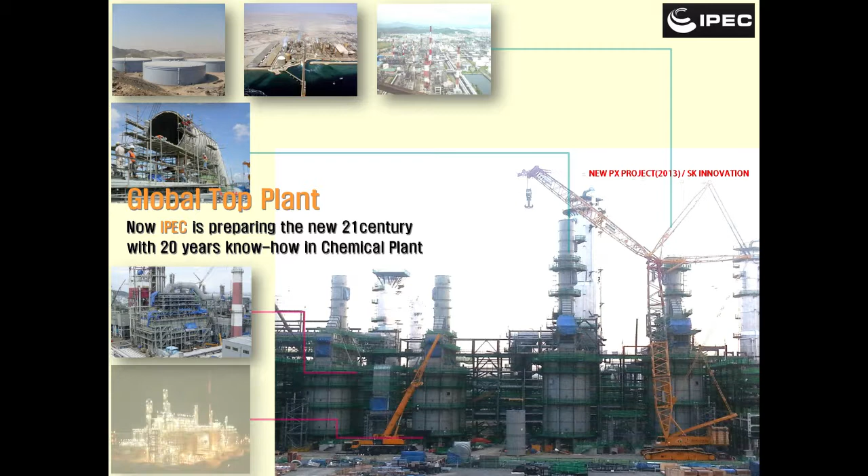IPEC took its enthusiastic first step aiming to be the best heater company, providing perfect quality and service based on 20 years of experience in the industry and excellent manpower. IPEC touches customers' hearts with interaction of deep trust.

Company profile: a summary of the company, and company background.

Organization and business partnership. Certificate of Business Registration and Registration of Chamber of Commerce and Industry, ASME stamp, ISO 9001 and 14001 certificate, registration of business, registration of construction business, and certification of international contractor.

IPEC has 2 factories, and we'd like to introduce major constructions with the detail and photos.

After President Y.H. Hwang established iPlant Company Limited, with all of his know-how, IPEC, based on all the experience of iPlant, was established in 2016 in the field of industrial heater manufacture and installation as revamping work, emergency work, refractory, any kinds of tank for plant area.

IPEC is located in Jeddah City, KSA, with 30 employees including professional technicians. Contact is 12-238-8868, and you could visit our page at www.ipec.pro.

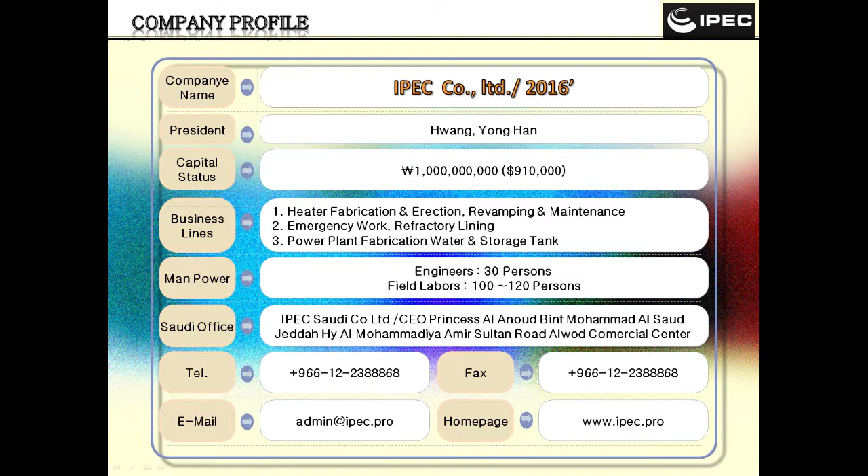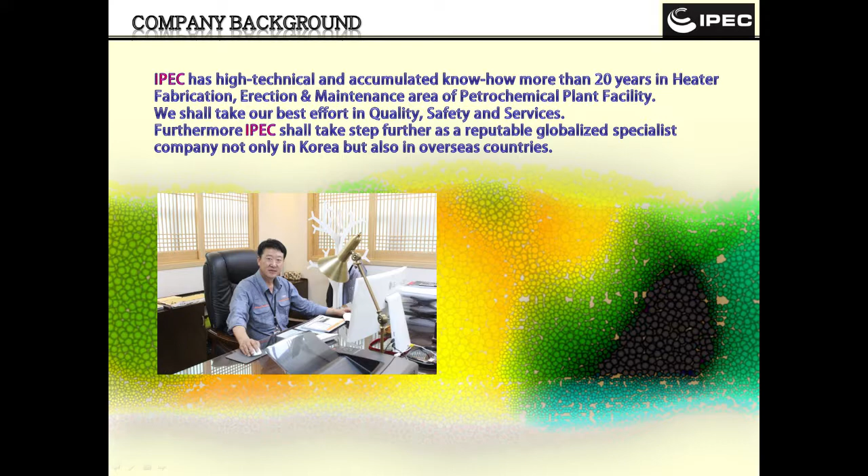IPEC has high technical and accumulated know-how of more than 20 years in heater fabrication, erection and maintenance for petrochemical plant facilities. We shall take a step further as a reputable globalized specialist company, not only in Korea, but also in overseas countries.

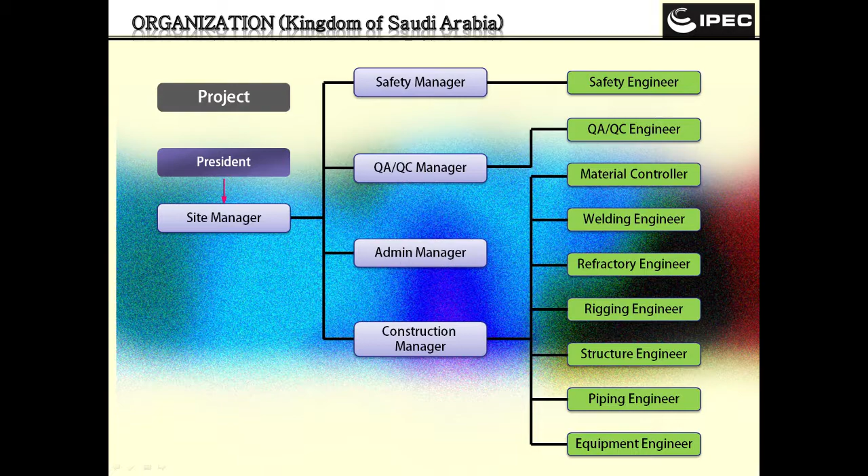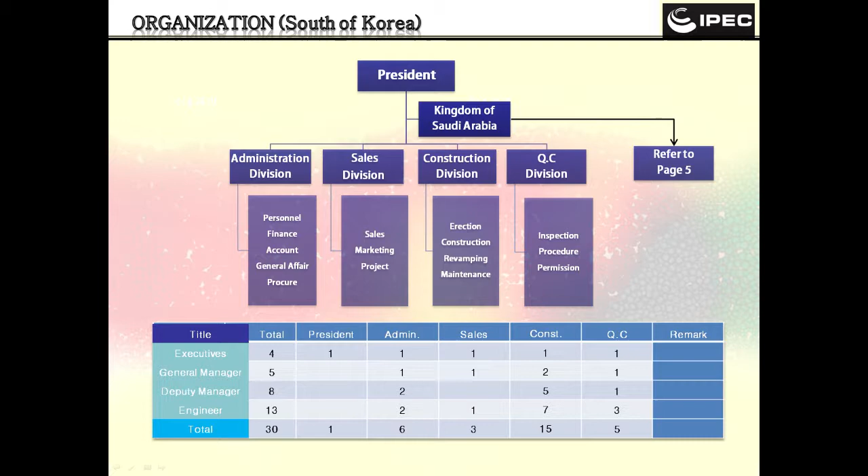The head office in Korea consists of 30 employees, including the president. Regarding materials, engineering, and execution of works, they can quickly take action, even dispatch professional technicians if necessary.

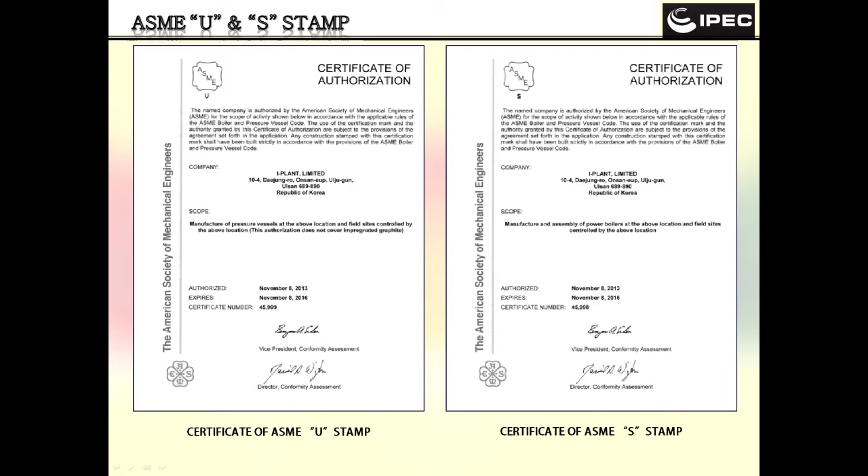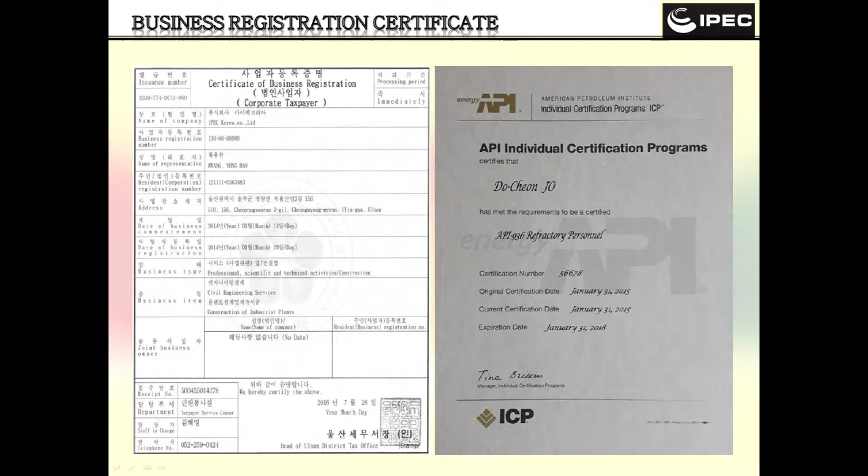IPEC acquired the commercial registration certificate issued by Jeddah Chamber of Commerce, ASME stamp U and S, ISO 9001 and 14001, and certification of international contractor. As it shows, IPEC has been perfectly preparing all the documents related to the works with best service for customer satisfaction.

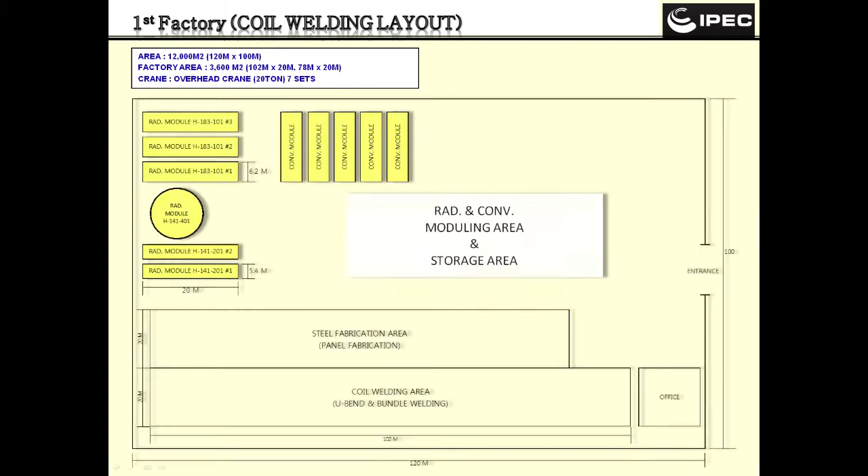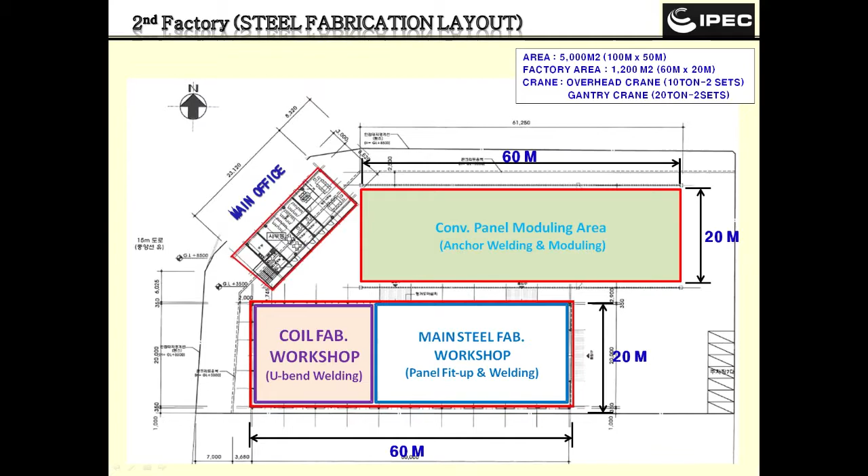IPEC has 2 factories. Each factory has been operated to be suitable for production of heater and structure. The first factory is specialized in pipe cutting and welding assembly. We ship fully assembled heaters if needed.

The second factory is for manufacturing and assembling steel and structure.

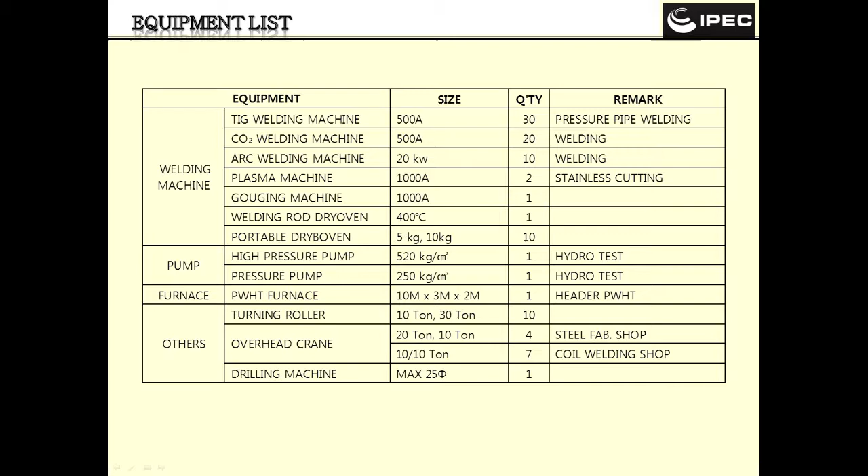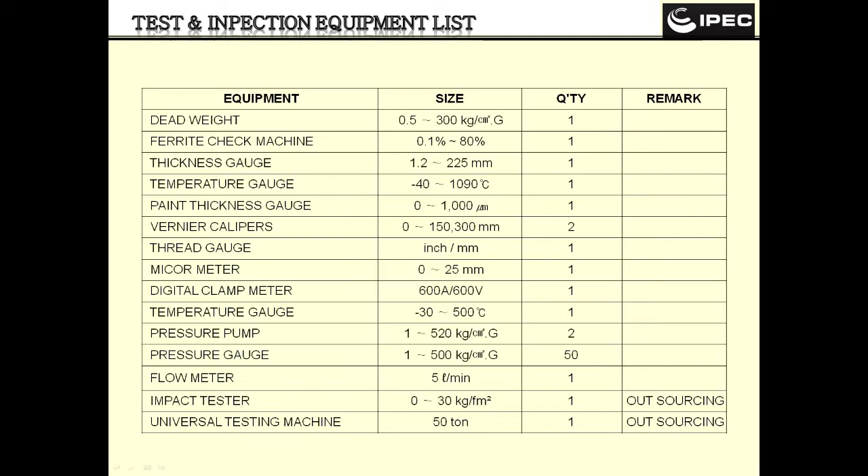The equipment of the factories includes 30 TIG welders, 20 CO2 welders, 10 arc welders, 10-ton and 20-ton overhead cranes. The inspection equipment includes various devices such as strength test, thickness gauge, temperature measuring device, and pressure measuring device.

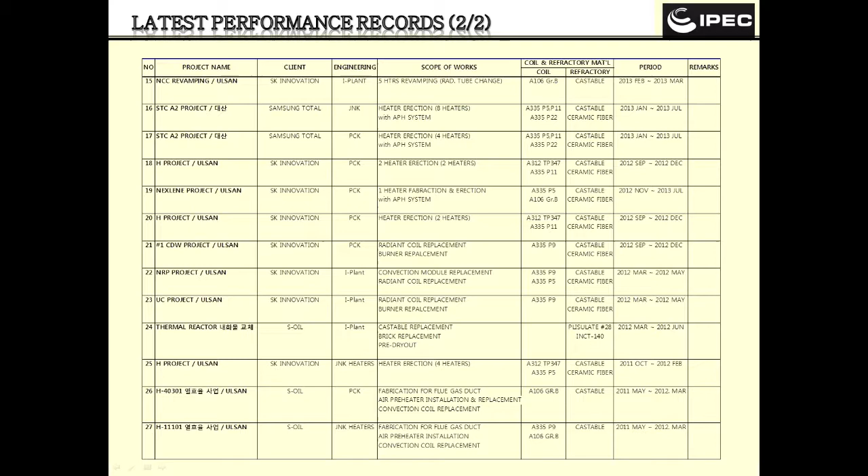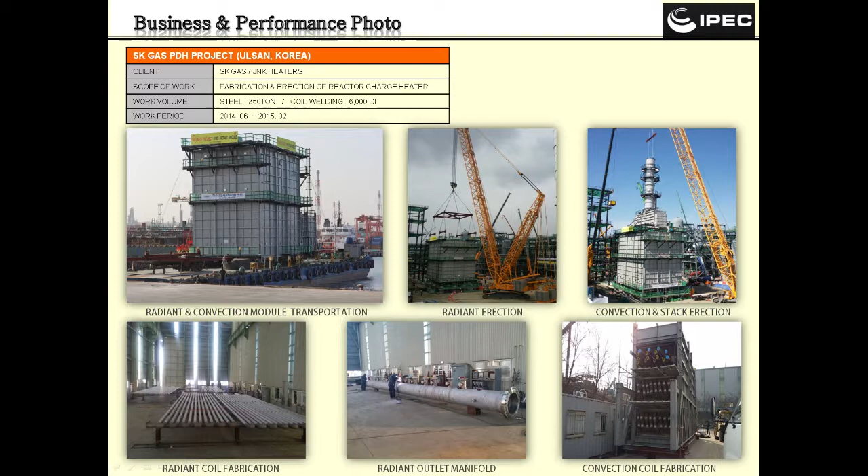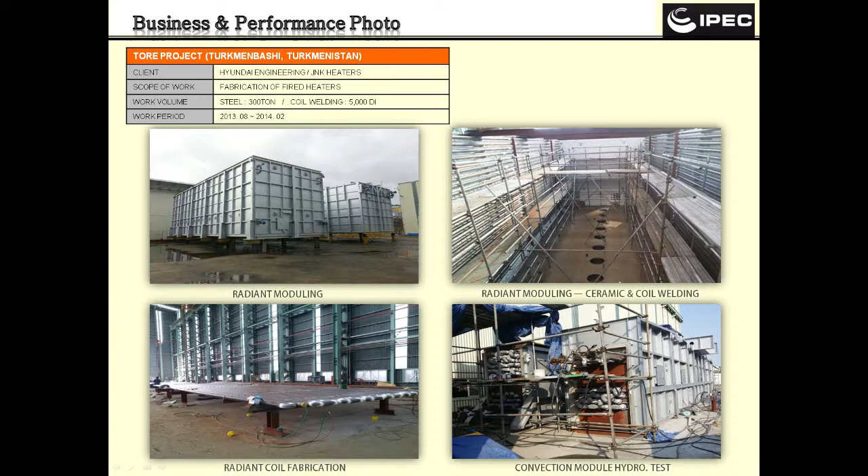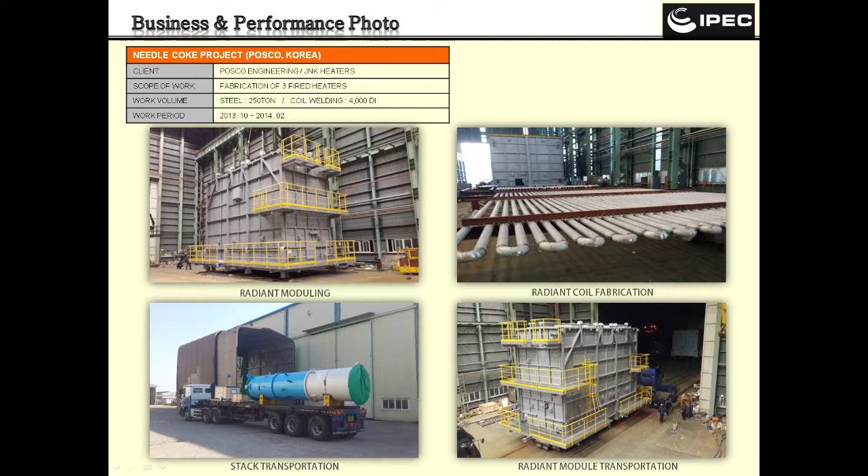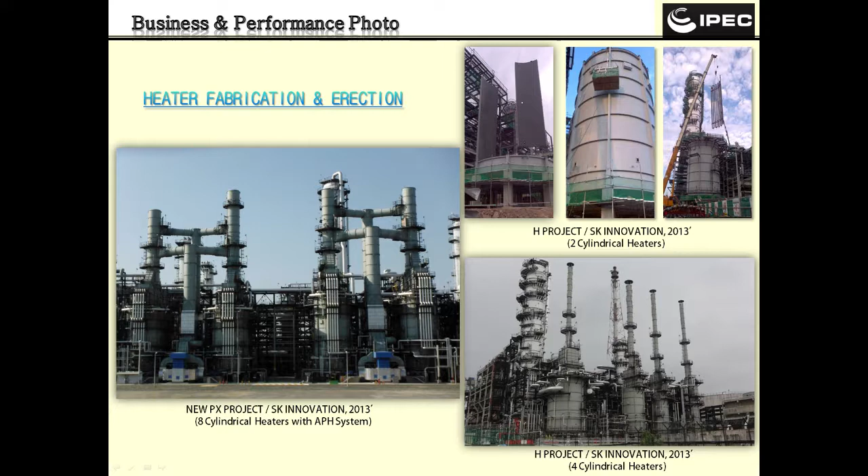Manufacturing and installation of 8 cylindrical heaters for SK Innovation in 2013.

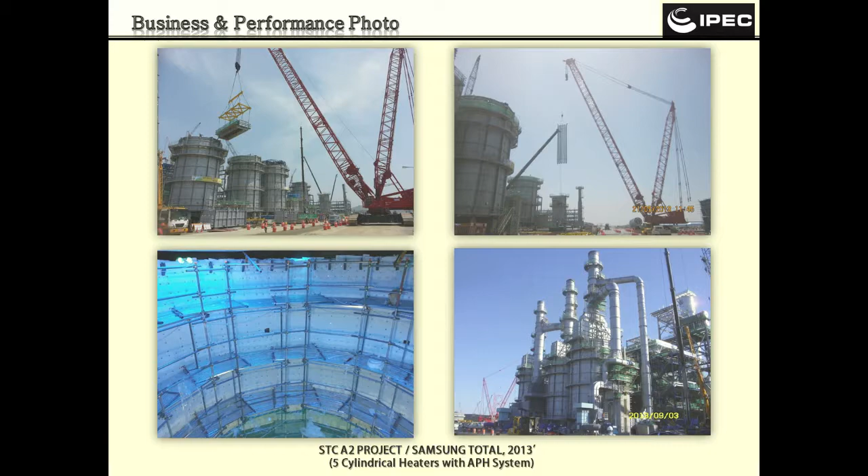Manufacturing and installation of 5 cylindrical heaters with APH system for the STC A2 project, Samsung Total, in 2013. Course photos for full moduling work.

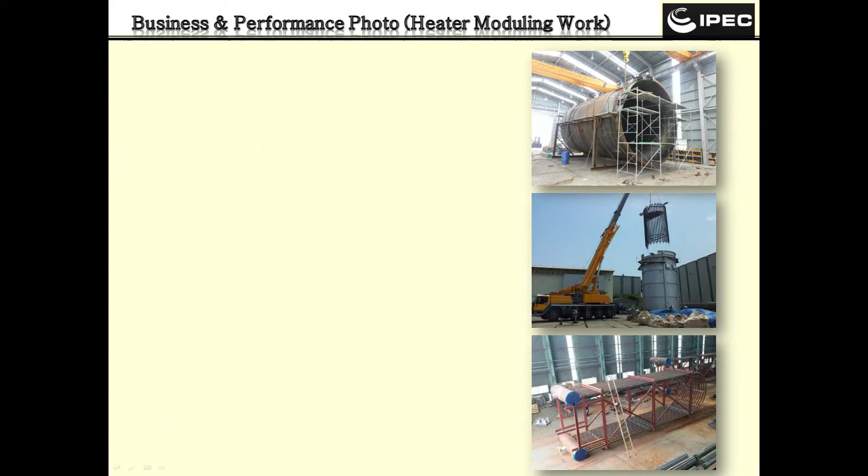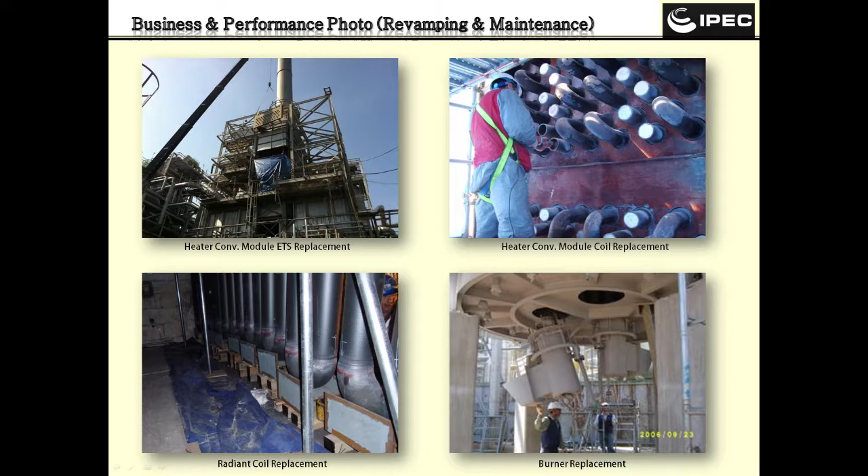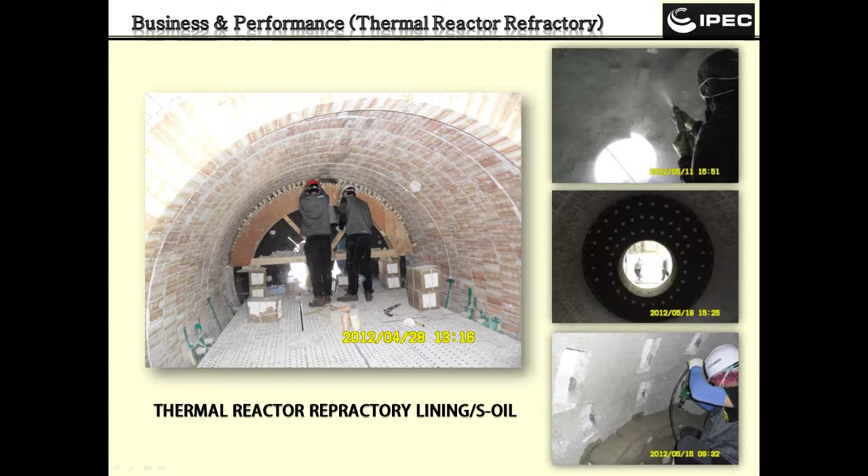Photos at the time of shop manufacturing and new installation in refractory lining works. Photos of decomposition refractory work process and thermal reactor refractory repairing work. Course photos for refractory dryout before shipping of completed products.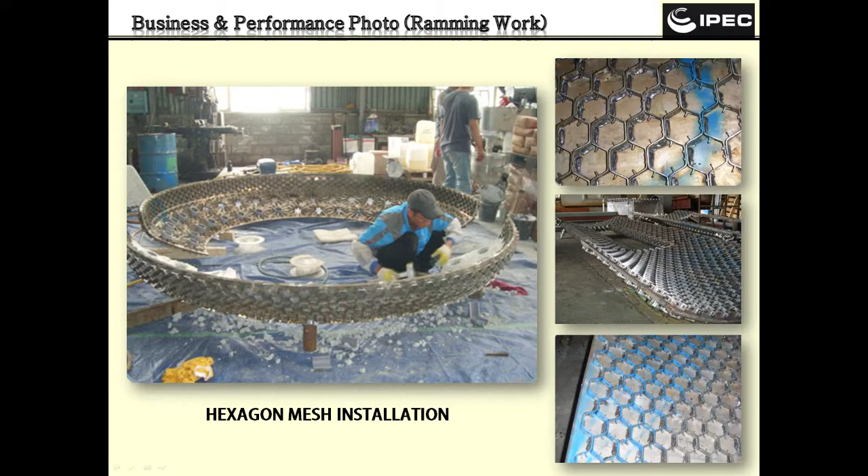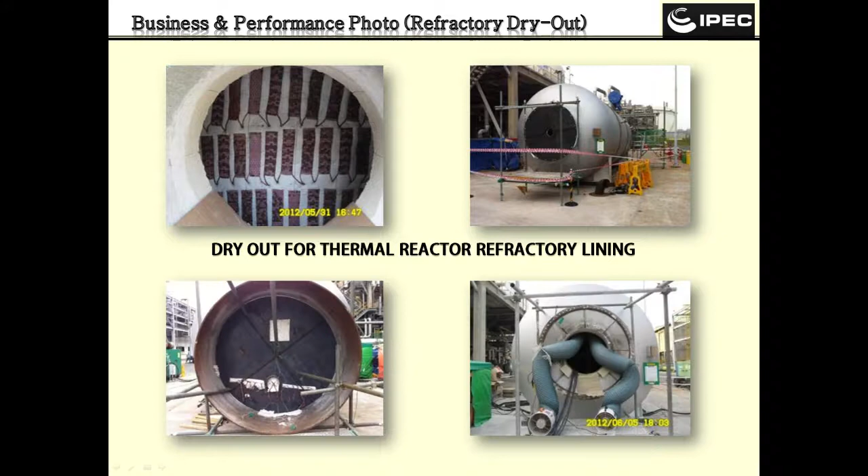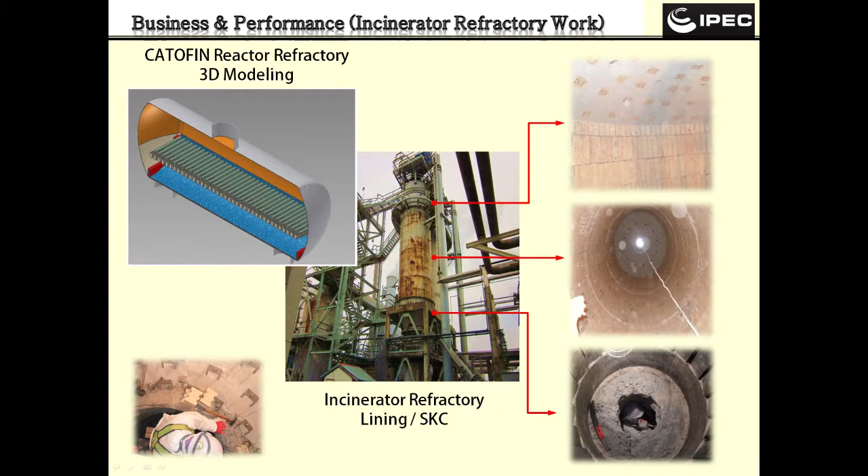New installation and maintenance work flow photos of incinerator refractory. Various refractory lining work photos and CCR heater burner, reformer burner construction photos.

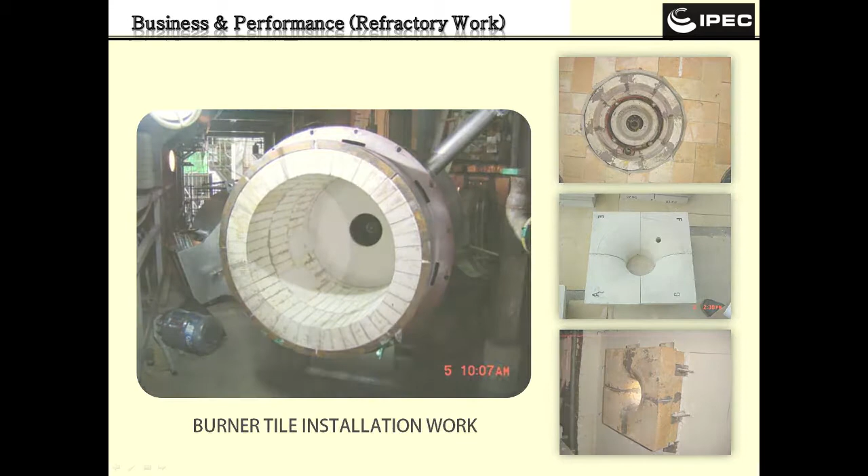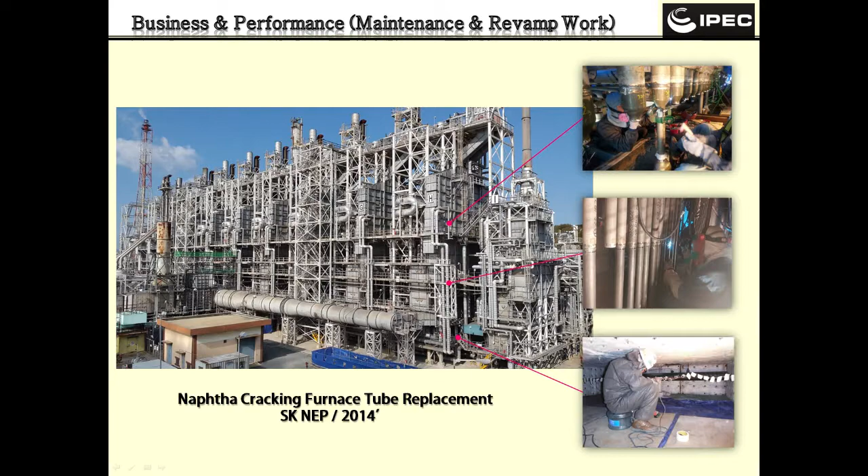Naphtha cracking furnace maintenance work, SKNEP in 2014. Photos of new heater and CCR heater revamping work for FCFC Formosa in 2016 from 2015. Photos of SK Energy emergency work.

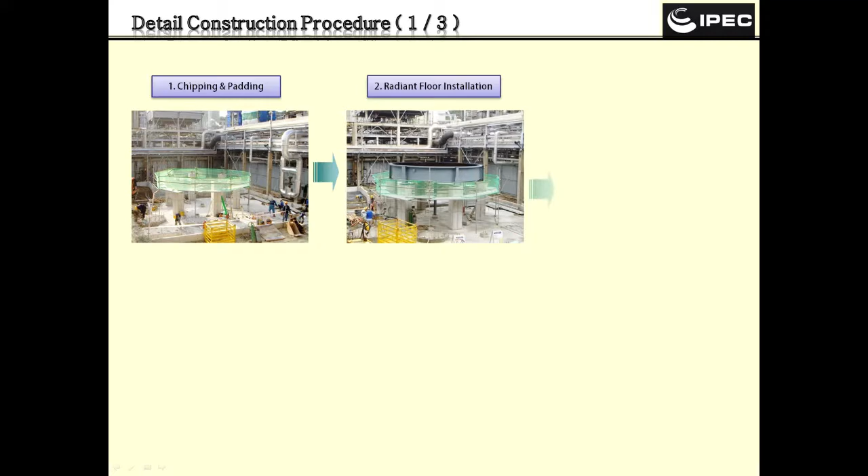For heater erections, detailed installation specification is shown as below. After completing the chipping and padding on the foundation column, install the first radiant module base and radiant side wall panel. Finish the internal scaffolding work and finish the refractory work.

Next step, installing radiant tube and radiant roof and convection module. Install the remaining stack, APH system, and duct. Finally, perform installing jump over, crossover piping and leak test.

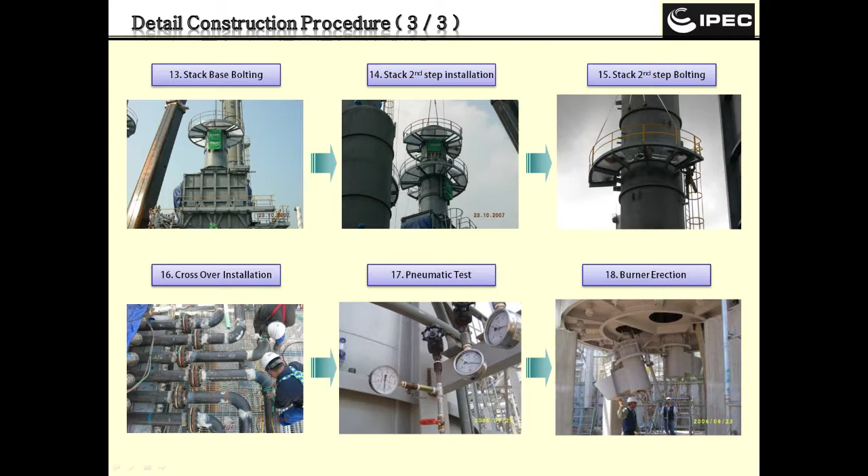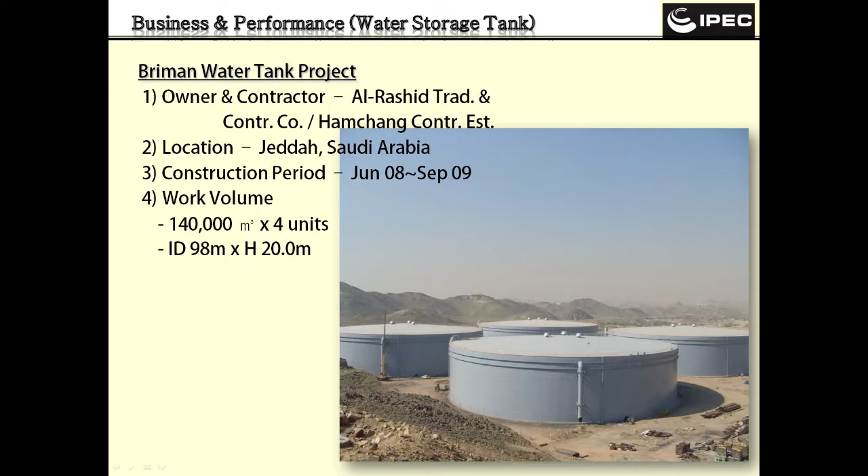QAFCO 5 project storage tank, Doha, Qatar erection work. Briman water tank project, Jeddah in Saudi Arabia. Water tank detailed installation specification.

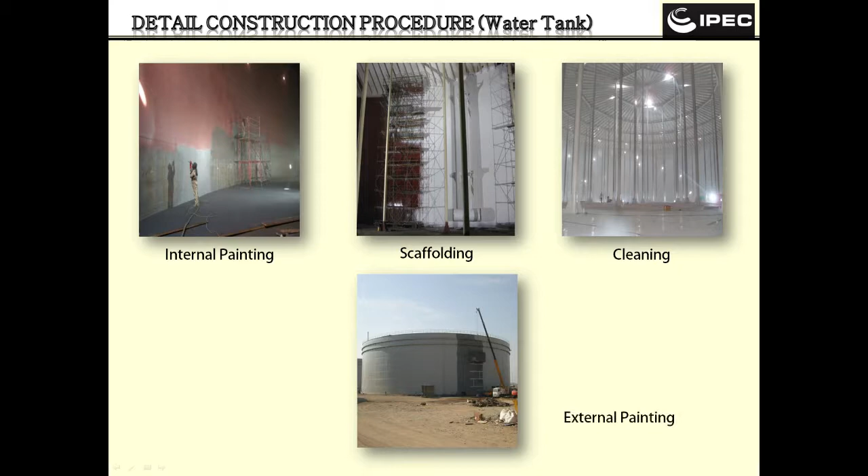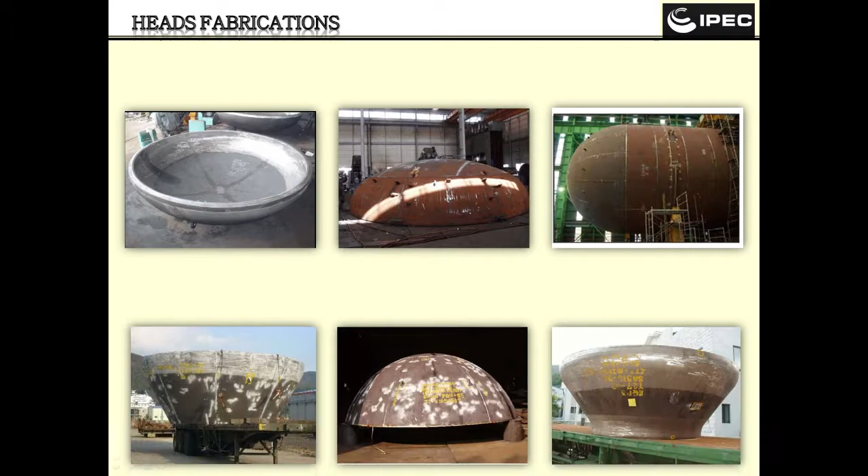Major business partnerships in Saudi Arabia include Aramco and SABIC. Major EPC companies are Daelim, GS-E&C, Samsung Engineering, SK E&C, Daewoo E&C, POSCO E&C, and IPEC E&C in Korea. Major engineering companies are JNK Heater, JGC, ITT, KTI, and KBR. We've been continuing to cooperate with them to perform many projects.

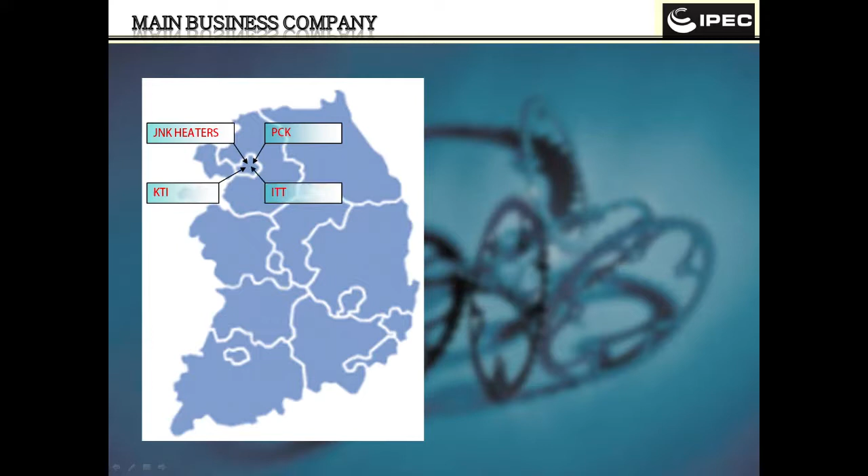Korean and international major clients, EPC and engineering.

Location of IPEC Corporation branch office. Location of head office.

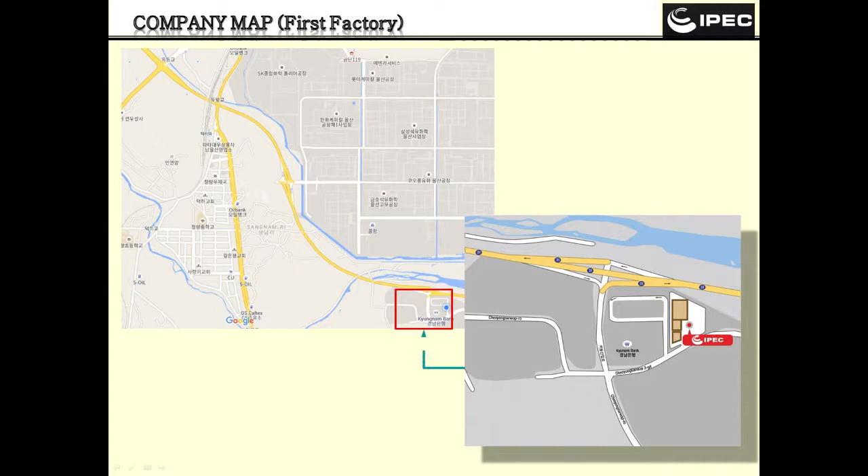IPEC will be a company that always treasures the value of customers, repaying customers' trust and making the world comfortable for mankind.